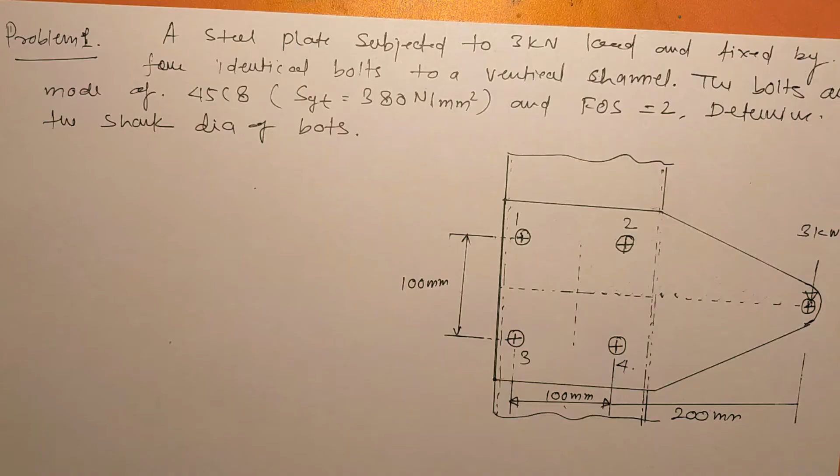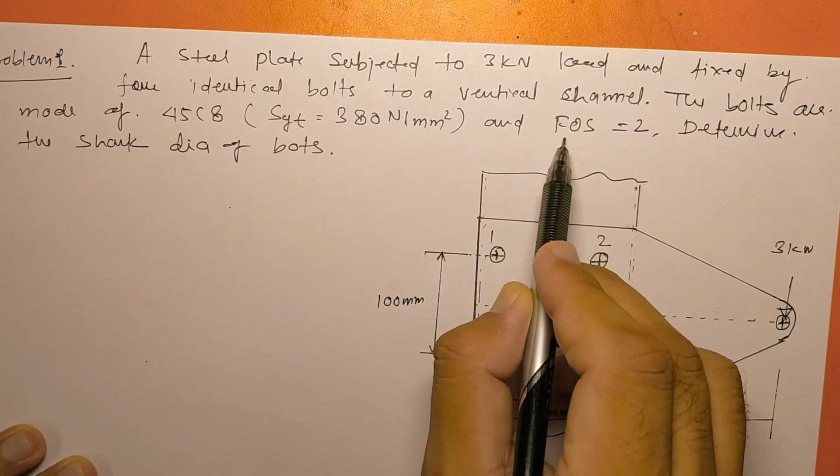Today we are going to discuss the eccentrically loaded bolted joint in shear. So in the first problem we are given a steel plate subjected to a 3 kN load and fixed by 4 identical bolts to a vertical channel. The bolts are made of 45C8 plain carbon steel for which the yield tensile strength is given as 380 N/mm², and we are given a factor of safety of 2, and we need to determine the shank diameter of these bolts. So we'll begin with the solution.

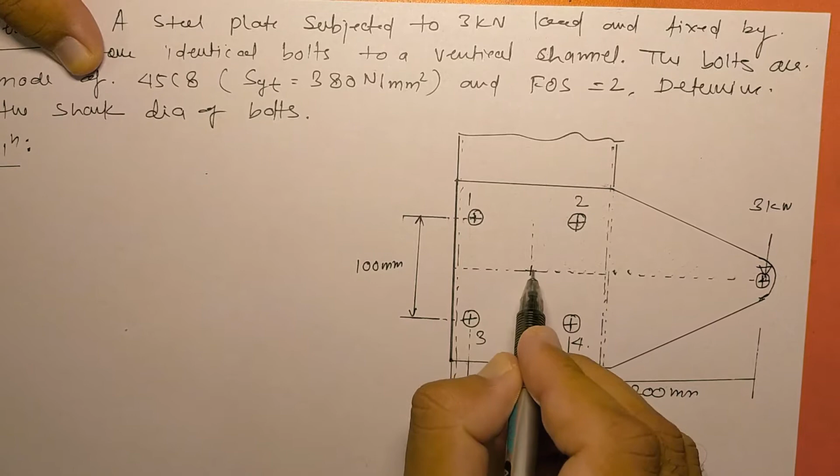So to design any component, the first step is to do the force analysis. So here we need to design the bolts, so we need to find out the forces acting on these 4 bolts. So before going into the solution of this problem, I'll discuss one concept of transferring force from one point to another point. So for that, if we consider a

object, and suppose this is the center of gravity of this object, G, this point, and one force acting at this point in this direction, this is force F. So this is the line of action of this force F. So now we want to transfer this force F to the center of gravity, this point G.

So for that, if we apply 2 forces at this point G, one force F in this direction which is equal in magnitude to this force F and parallel in direction, and a second force just opposite to this and equal in magnitude, F, in the opposite direction, they will nullify the effect. So ultimately there is no effect of these forces.

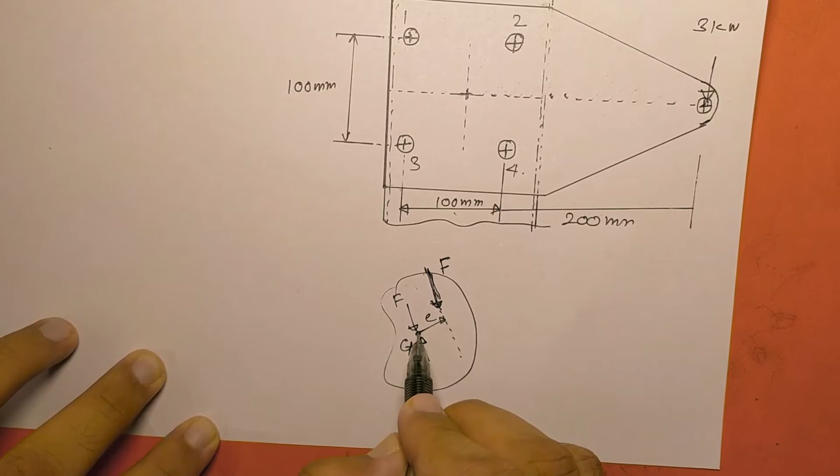But now what we can do, suppose this offset is E. So now we can think about this force F and this force F all together will create a moment about this point G. So the effect of this F and this F can be replaced by a moment about this point, and this force F will remain as it is.

So this complete system, earlier this was just like that, this is point G and this is F and this offset E. So we did one thing, we applied 2 equal and opposite forces F and F, and now this can be replaced by this. This is point G, this F will remain as it is, and this F and this F will create a moment about this point G.

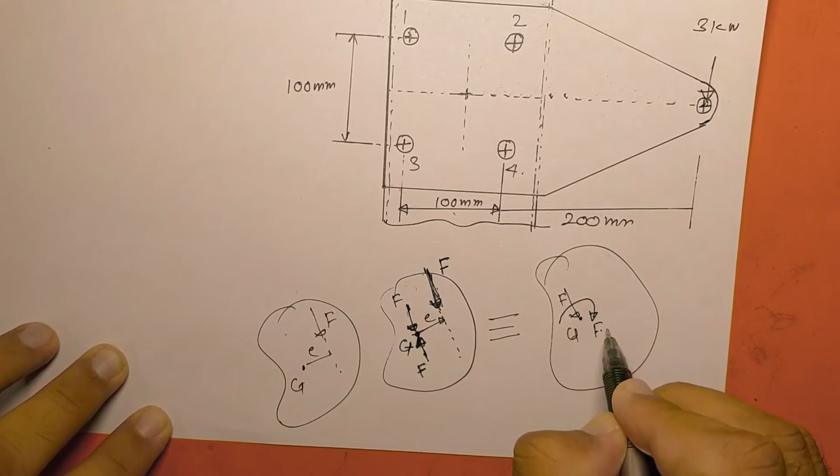That moment would be this F multiplied by E, and the direction would be in this direction. So there would be a moment of F into E in this direction. So this system can be represented by this, both are the same thing. So this F can be replaced or can be transferred to this point G. So a similar concept will be used here.

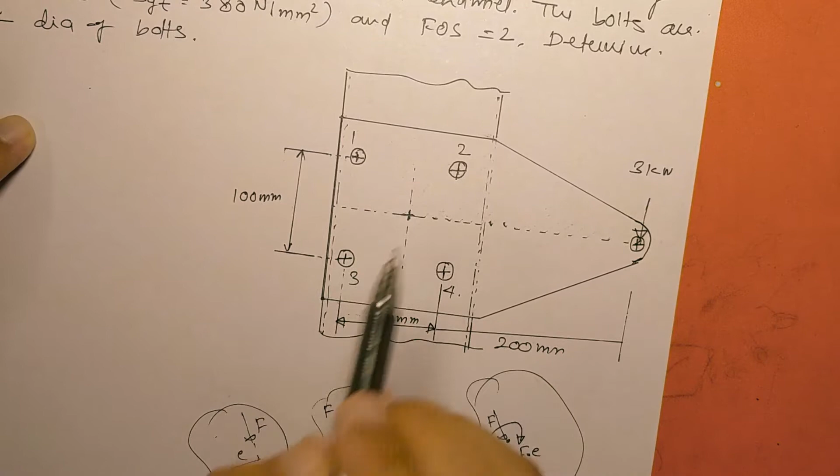So this 3 kilonewton force, and first of all we have to locate the geometrical center of gravity of this geometry. So here we can say this distance is 100 mm and this distance is also 100 mm. So we can say all 4 bolts are located at the corners of one square. So the center of gravity can be found using the formula x bar equals summation of A_i x_i bar over summation of A_i, and similarly we can find y, but from symmetry in this case we can say the geometrical center would be this one. So this is point G. So at this point G we can transfer the effect of this 3 kilonewton.

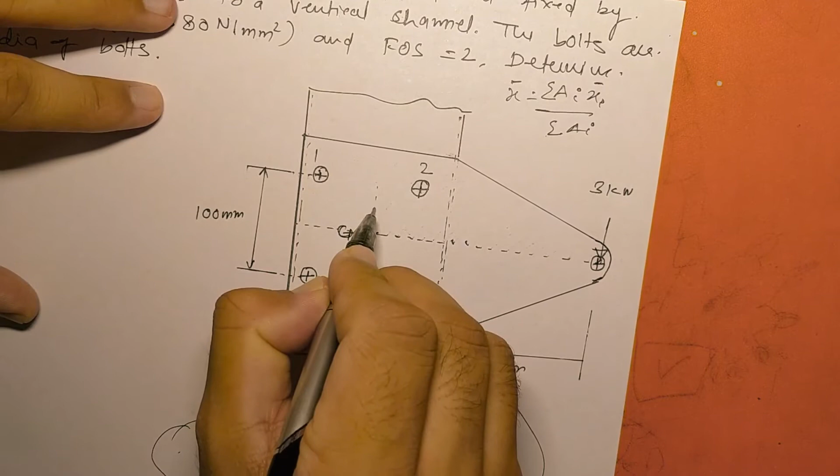So the effect of this 3 kilonewton load would be one force in the downward direction which is 3 kilonewton, and because of this 3 kilonewton force and this offset, this is 200 mm and this is 50 mm. So 50 plus 200, this is 250, we represent this offset by E. So this 3 kilonewton multiplied by E, there would be one moment in this clockwise direction. This is equal to F into E. So F is 3 kilonewton and E is equal to 250 mm. So now we need to consider this system only, or we'll draw it here.

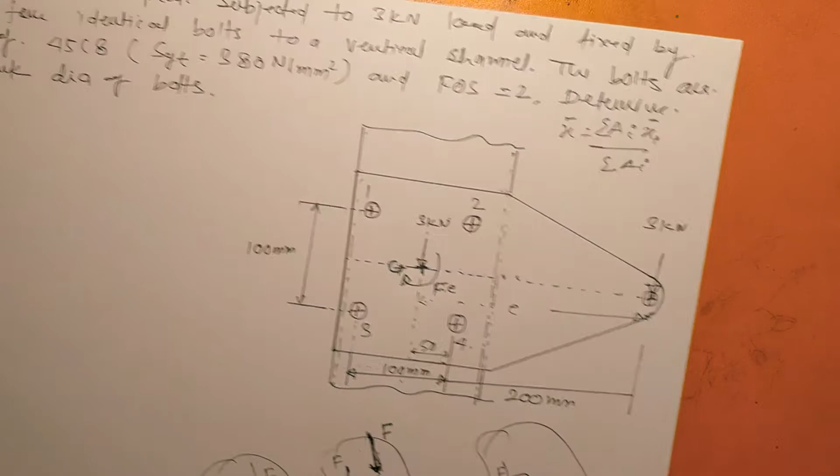So suppose this is our geometry and these four are bolts. This is 1, this is 2, this is 3, and this is 4, and this is point G, and at this G point there is one 3 kilonewton load and there is one moment which is F into E.

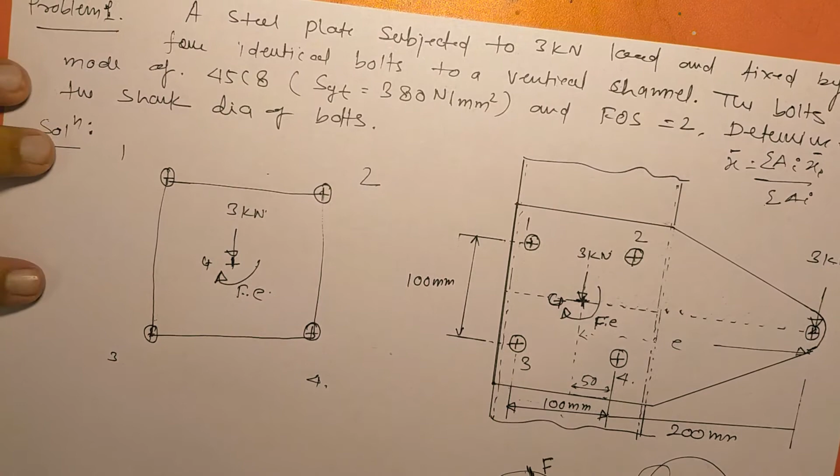So now we'll do the force analysis, or force acting on these four bolts. First of all we need to find out the forces on the bolts because of this 3 kilonewton. So we can say this 3 kilonewton load will be shared by all four bolts, and this will be distributed in equal amount on all four, and that force would be a shear force. So first of all shear force,

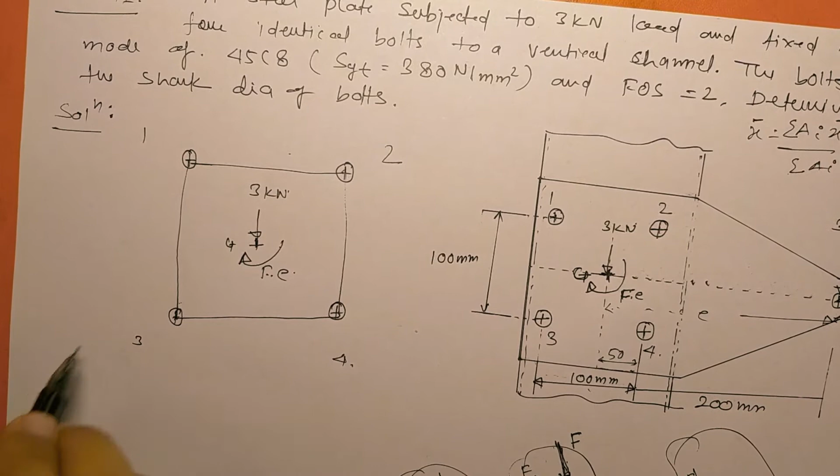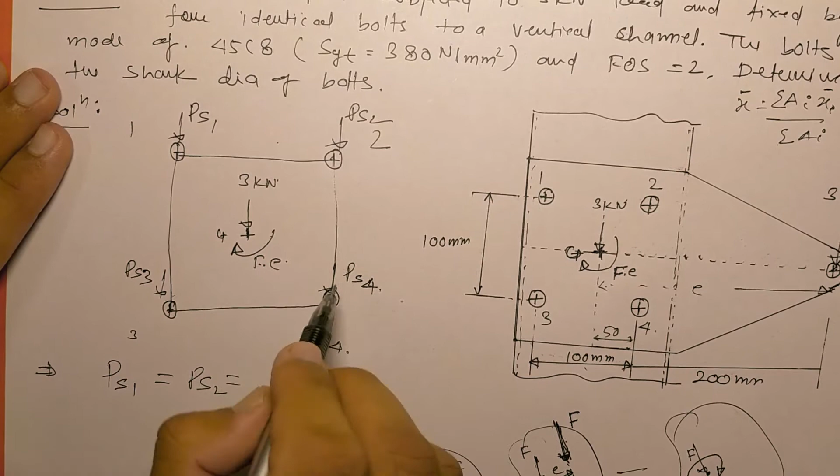I'll write PS1, the shear force on bolt 1, is equal to PS2. This is the downward force on 2, PS1, PS2, PS3, and this is PS3, and this is PS4. So these all forces would be equal. PS4 is equal to total F, this is 3 kilonewton, divided by number of bolts, 4. So 3 kilonewton divided by 4. So this would be 750 Newton. So the first force because of 3 kilonewton we have found out, which is 750 Newton.

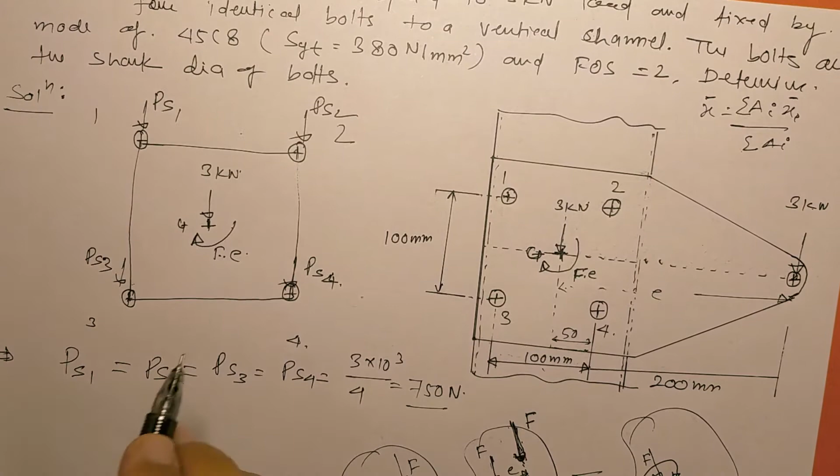And now there would be another force that would also be a shear force, because this F into E would try to rotate this structure in this direction, and these bolts will apply the force on this structure in the opposite direction and create the equal amount of moment in opposite direction. So now we need to find out the force because of this F into E.

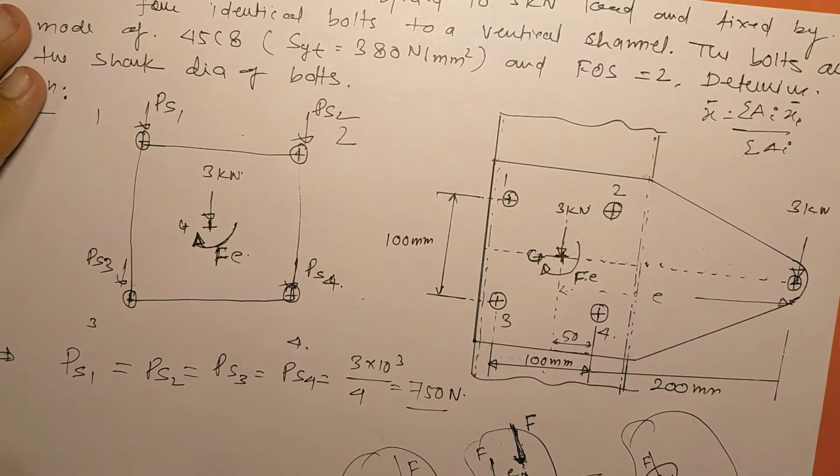So for this, first of all we need to find out the distance at which these bolts are located from this G point. So suppose this is the distance of first bolt, and we'll designate it by R1, and this is the distance from G point of second bolt. This is R2. This is the distance R3, and this distance is R4. So now we know this distance is 100 mm given, and this arm is also 100 mm. So this is a square, and this is the center of the square, intersecting both of the diagonals at this point.

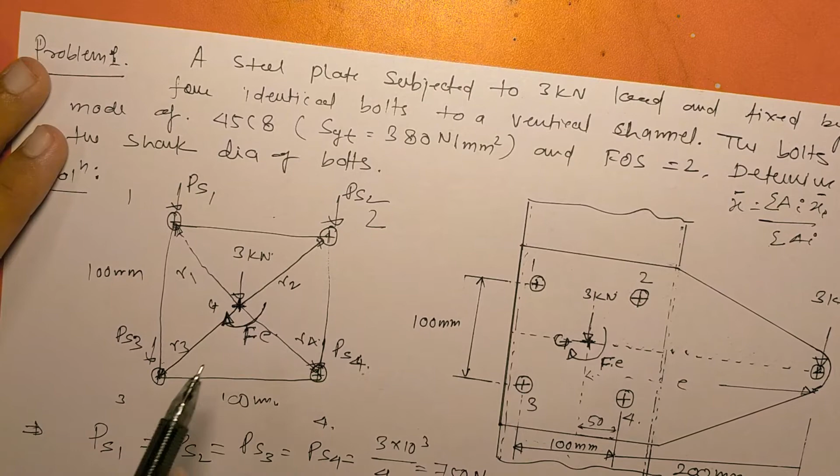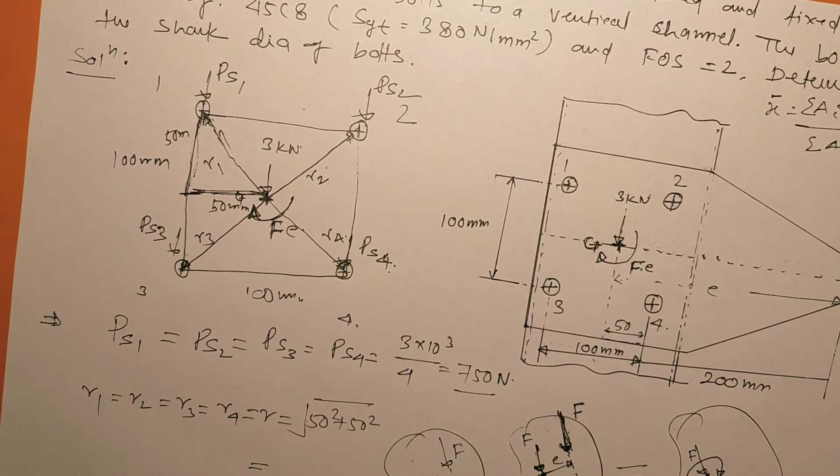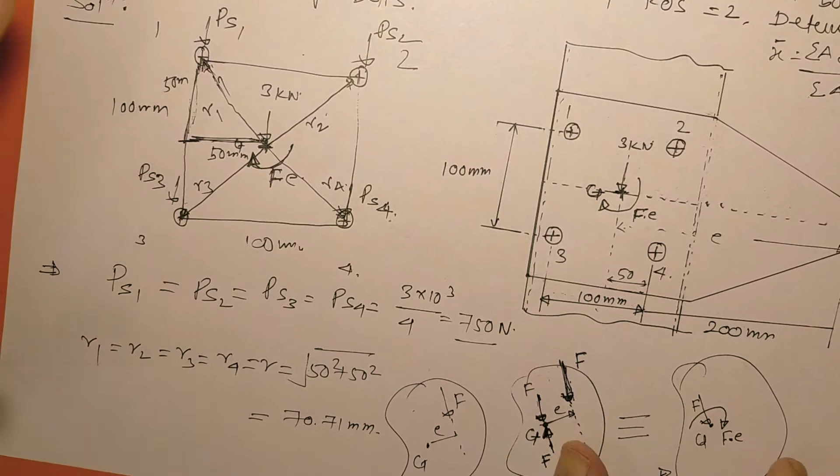So we know that this distance R1 is equal to the square root of this distance squared plus this distance squared. We can say this is 50 mm from the geometry, and this distance is also 50 mm. So R1, R2, R3, R4 all will be equal. So we can say R1 equals R2 equals R3 equals R4, and we call it R. That would be equal to the square root of 50 square plus 50 square. And if we solve this with the help of a calculator, then this would be 70.71 mm. So now we know the distance of all the four bolts from the center of gravity, this G.

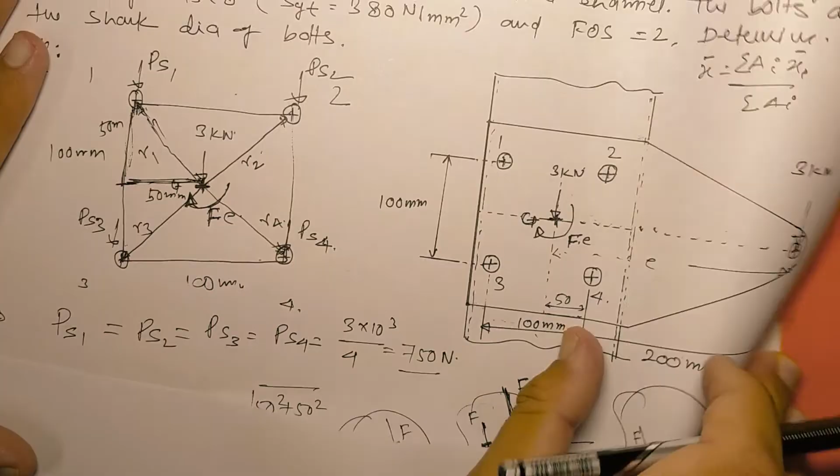So now we need to find out the forces because of this moment, and we know that the moment created by the reaction force exerted by all the 4 bolts on this plate would be equal to this F into E. So we can write one equation. We can say this F into E must be equal to the moment created by the reaction force exerted by all the bolts on the plate.

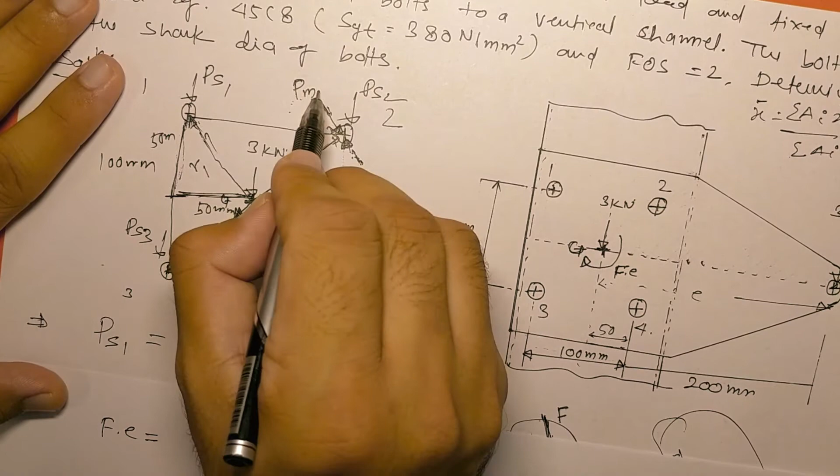And we know that if this is the direction of this F into E, the forces exerted by the bolt on the plate would be in this direction, and force on the bolt would be in this direction, and that would be perpendicular to this radial distance. This is the force on the bolt and this is the force exerted by the bolt on the plate, and both would be equal in magnitude. So we can designate these forces by Pm. M stands for moment, or we can say the force because of moment. So Pm2, Pm1, Pm3 and Pm4.

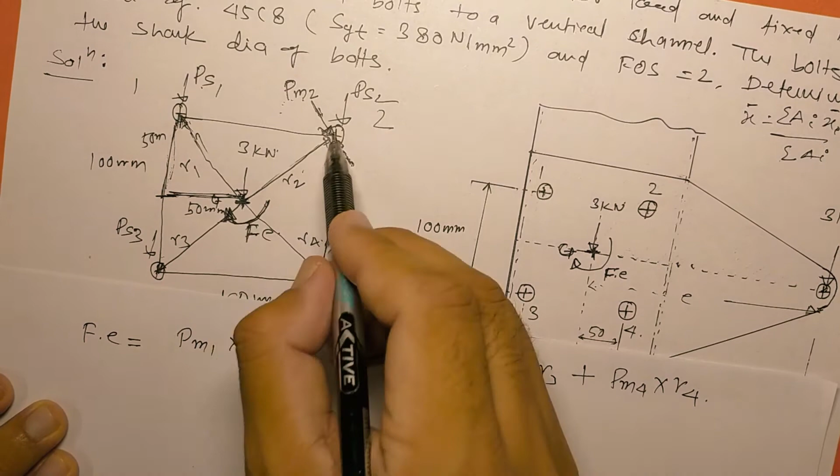So now we can write Pm1 multiplied by R1 plus Pm2 multiplied by R2 plus Pm3 multiplied by R3 plus Pm4 multiplied by R4. And one more thing, the force because of this moment on the bolt would be proportional to the distance from this point. So we can say Pm1 would be proportional to the distance, and distance is R1. So if we remove this symbol of proportionality, we can say Pm1 is equal to some constant C into R1. Similarly, Pm2 is equal to C R2, and we can say Pm3 is equal to C R3, and Pm4 is equal to C R4.

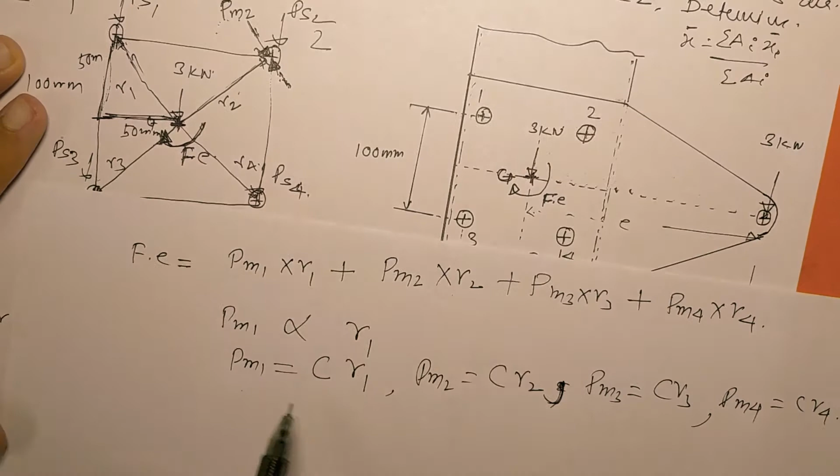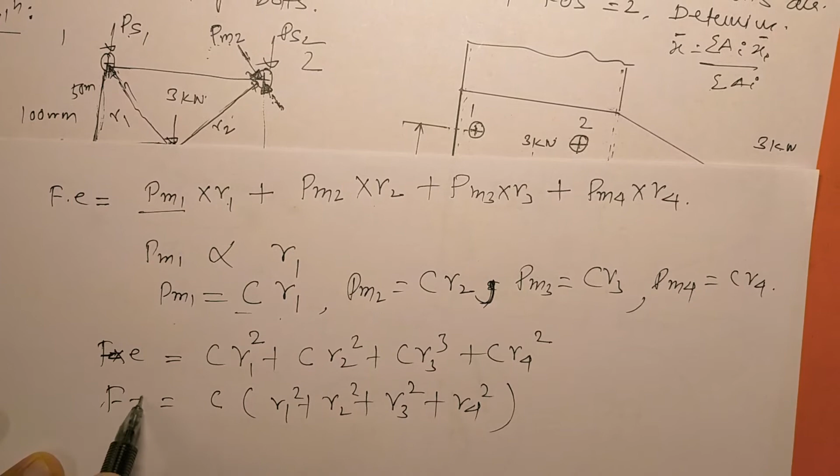So if we replace these values in this moment balance equation, then F multiplied by E is equal to, in place of Pm1 we can write C R1, plus R1 into R1, C R1 square, C R2 square, C R3 square plus C R4 square. So we can take C as common: C and R1 square plus R2 square plus R3 square plus R4 square. From here we can find this constant C, and C equals Fe divided by R1 square plus R2 square plus R3 square plus R4 square.

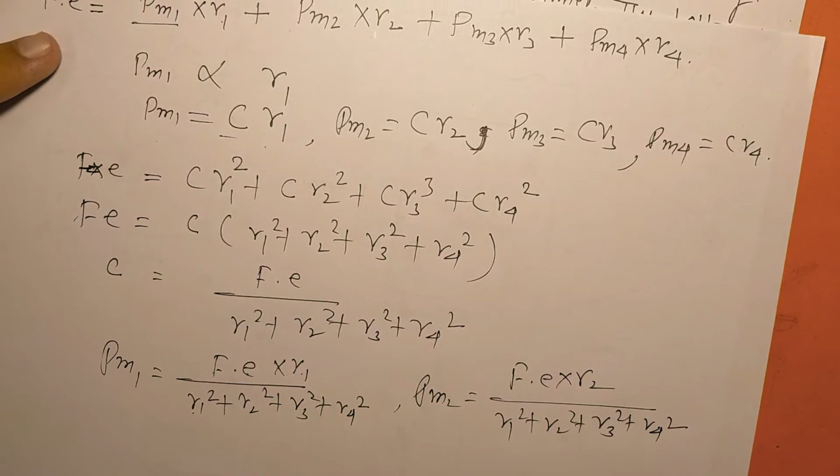Now we can find Pm1 because we know the value of C. So Pm1 would be C, which is F into E over R1 square plus R2 square plus R3 square plus R4 square, multiplied by R1. Similarly, Pm2 would be Fe multiplied by R2 over this value. So we can write Pm2 is equal to Fe multiplied by R2 over R1 square plus R2 square plus R3 square plus R4 square.

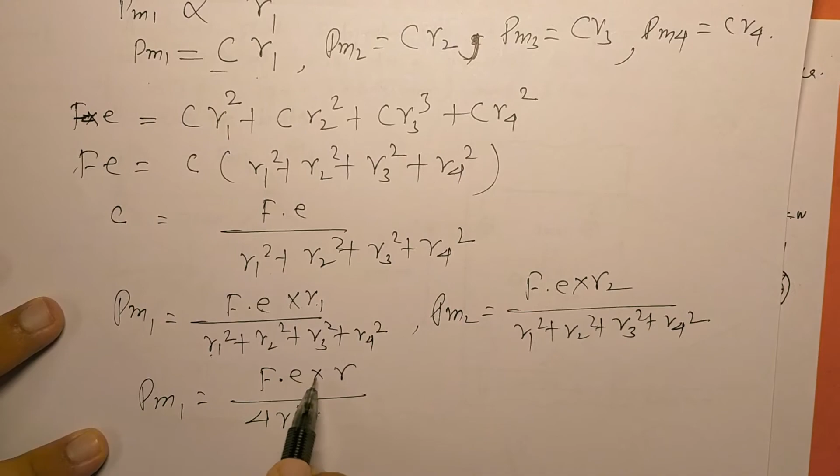But in this particular problem, R1, R2, R3, R4 are all equal. So for this problem we can write Pm1 is equal to Fe multiplied by R1, which equals R, and the denominator becomes 4R square. If we replace these values, the offset E equals 200 plus 50, that is 250 mm.

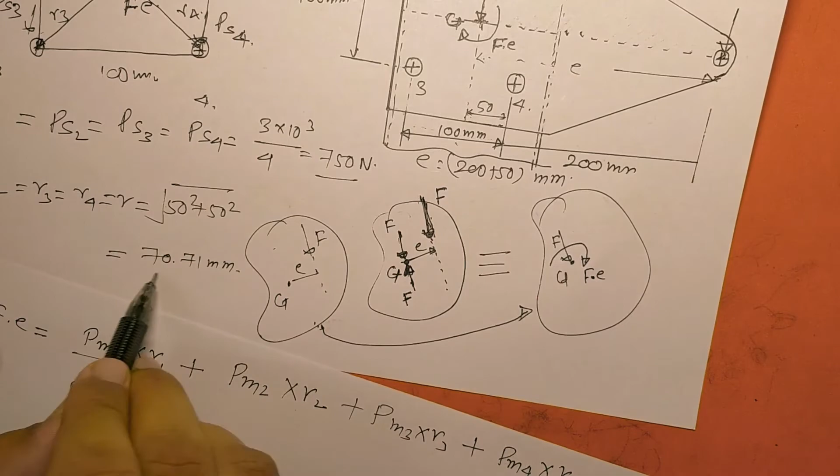So now we can replace the values here. F is equal to 3000 Newton, E equals 250 mm, and R, which we calculated, equals 70.71 mm. So this becomes 70.71 mm over 4 times R square, 70.71 mm square. If we calculate this, we get the value equal to 2651.68 Newton.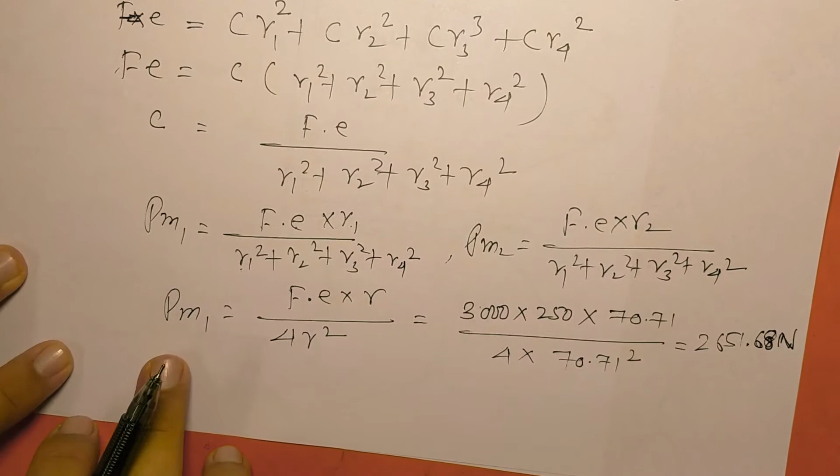The second shear force, because of the moment, is 2651.68 Newton, and the first shear force, because of the vertical 3 kilonewton load, was 750 Newton. So now we need to decide the heavily loaded bolt.

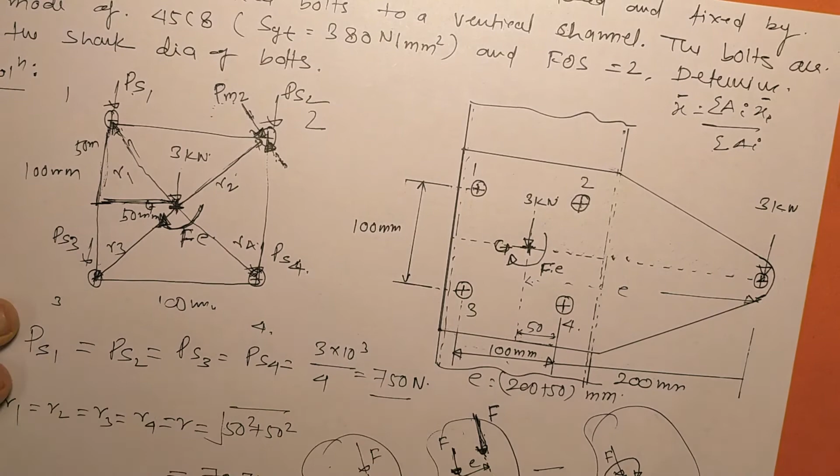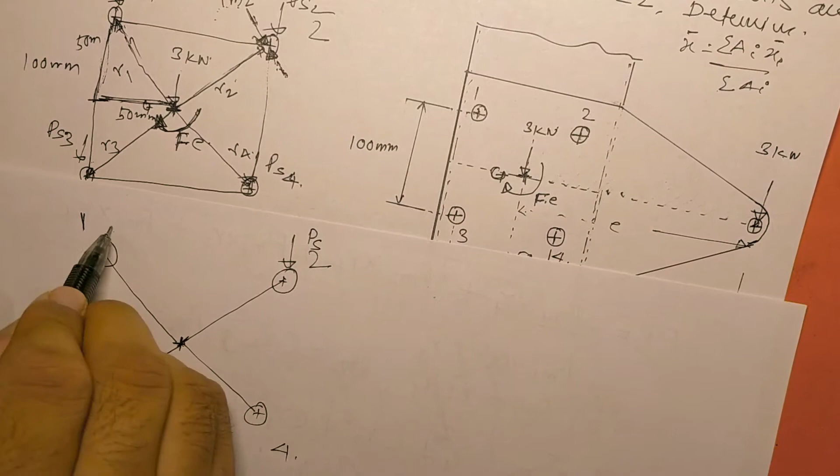I'll replot this diagram. So this is R, these are 4 bolts, and this is the center. These are bolts 1, 2, 3, 4, and there is one force PS. This force, which we found because of the 3 kilonewton load, is also PS. And because of the moment, there would be a force on the bolt in this direction, perpendicular to this. So this is the direction of the PM force.

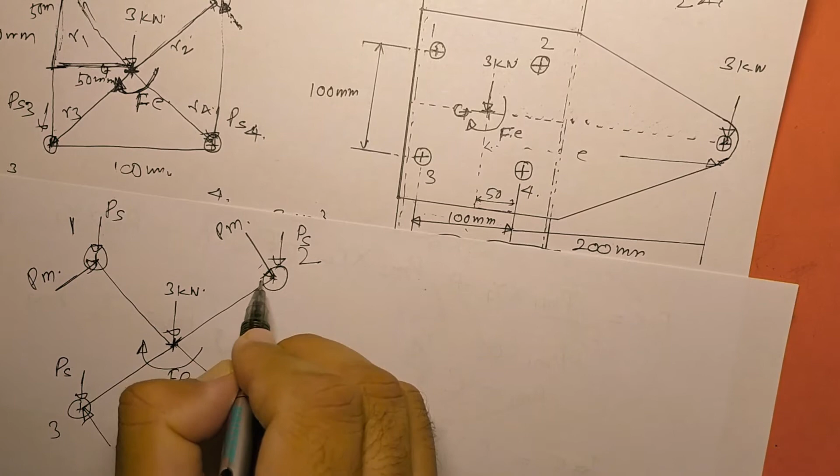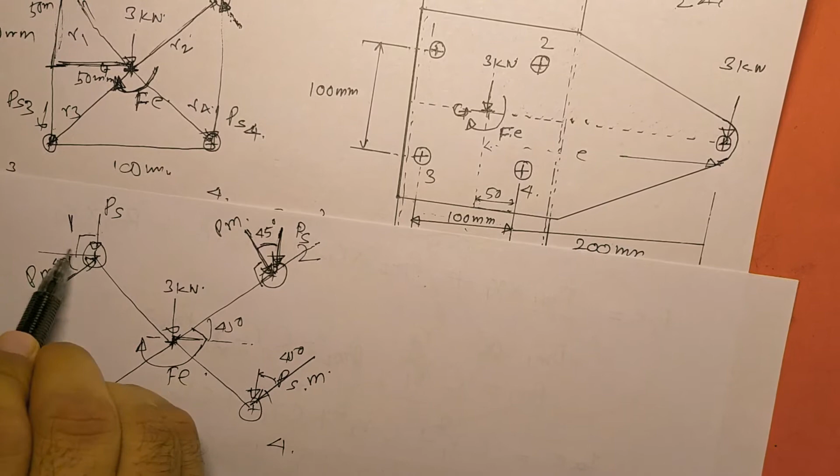Now we can say this angle is 90 degree, and the angle between this force PS, the shear force because of the vertical downward force, and this PM, the shear force because of the moment, would be 45 degree. From this geometry, if this angle is 90 degree and this is vertically downward, then this is 45 degree, and similarly this angle is also 45 degree. This would be 90 plus 45, total 135 degrees.

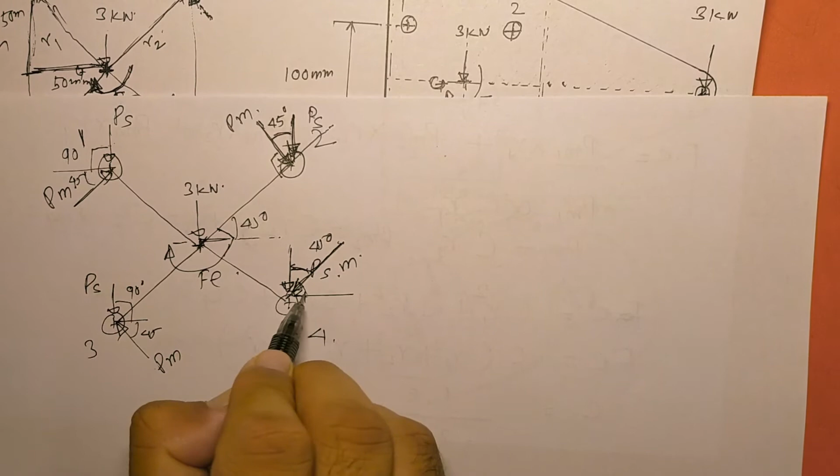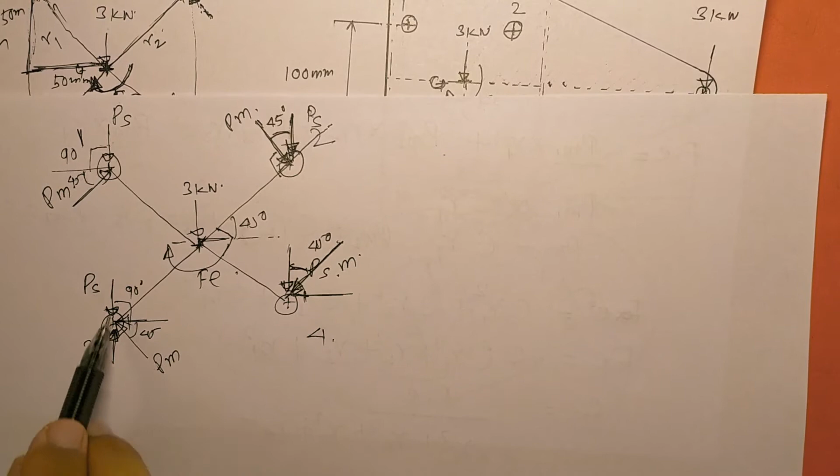If we find the resultant of these forces, we will find that bolt 2 and bolt 4 will be sharing more load, because this downward force PS is equal in all the bolts, and PM is also equal in magnitude. But if we resolve this PM into two components, there would be one downward component and one horizontal component. Similarly, if we resolve this other force, one component would be vertical and one horizontal. So this horizontal force and this horizontal force cancel out each other, and the effective downward force would be PS minus PM sine 45.

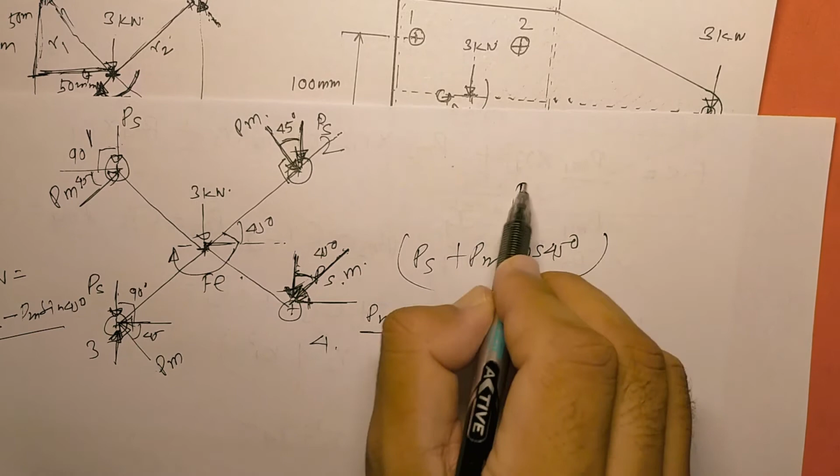So this is the effective P in the vertical downward direction. In this other case, the vertical downward force would be PS plus the cos component of this PM. So PM cos 45 degree, and this would be PM sin 45 degree. So this is the vertical force and this is the horizontal force.

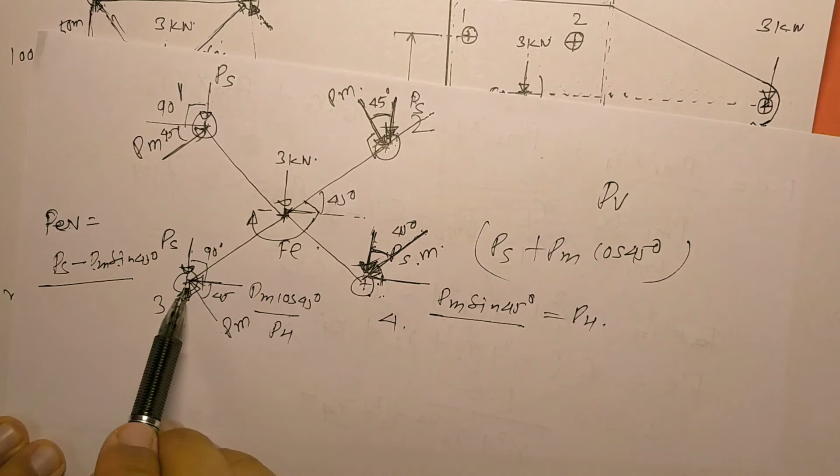And in this case, the effective vertical force would be PS minus PM sin 45 and the horizontal force is PM cos 45. So if we take the resultant of this vertical and this horizontal component, this would result in the larger force, and both of bolt 2 and bolt 4 would be loaded with the same load, and these two will be loaded with more load with respect to 1 and 3. So we can find out the effective load on bolt 2 or bolt 4, and we'll design the bolt

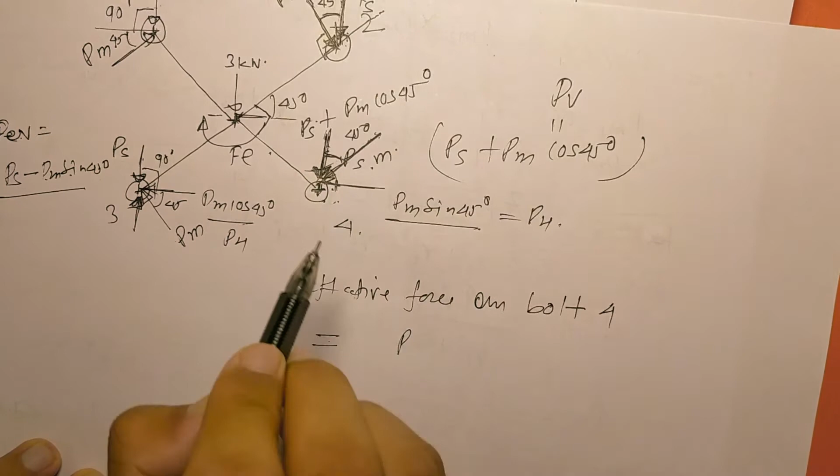according to that. So we can say the effective or resultant force on bolt 4 or 2, whichever, both are loaded with the same load. So that would be this PS, because this is the vertical load. The component of this PM is this already, this was PS plus PM cos 45 degree, and this is the horizontal component. So we can say PS plus PM cos 45 degree square of this plus square of the horizontal component. This is PM sin 45, so this PM sin 45 degree square, and the square root of this is P effective on 4 or 2 bolt.

So if we solve this, PS is equal to 750 Newton and PM was 2651.68 Newton. So we replace these values. So this would be 750 plus 2651.68 cos 45 degree whole square plus PM is 2651.68 sin 45 degree whole square and square root of this whole quantity. So if we solve this, the P effective force, now we are solving at bolt 4, so this is P effective on 4. P effective 4 is equal to 3225.9 Newton. So this is the P effective or resultant force on the bolt 4.

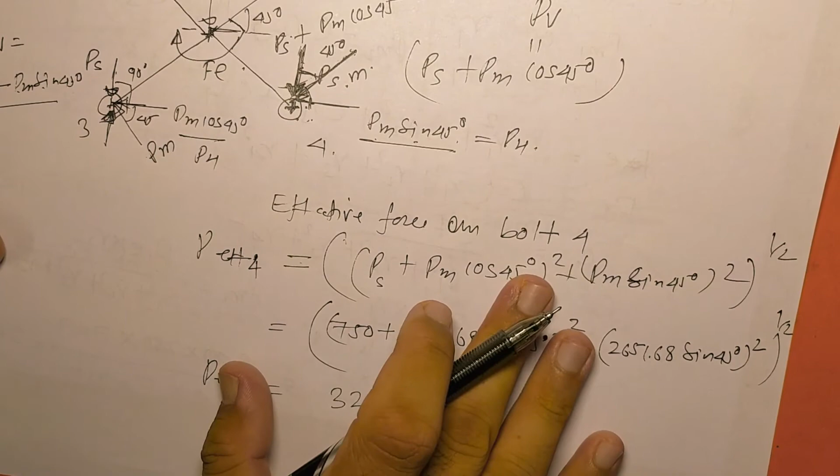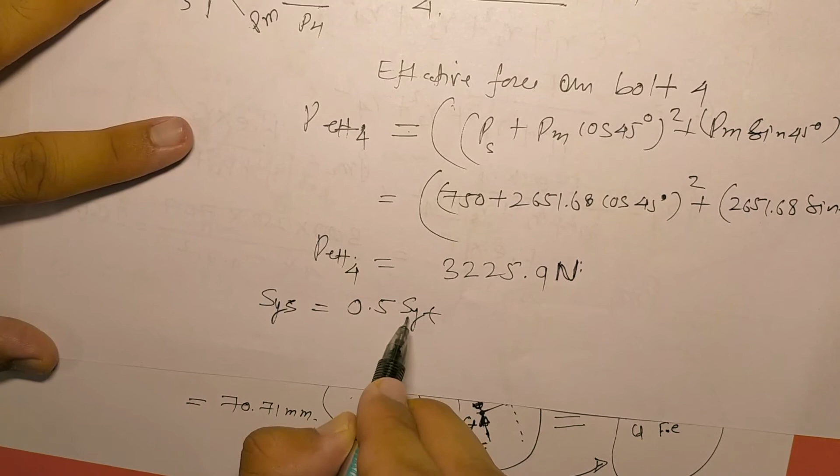And this is the shear force. So we can calculate the diameter using the shear stress. So we are given the capacity or strength of this bolt, that is SYT is equal to 380 Newton per mm square. So if we know the relationship, yield shear stress is equal to 0.5 of tensile yield strength, SYS is equal to 0.5 of SYT. So this is equal to 0.5 of 380 Newton per mm square. So this is the permissible shear yield strength. So if we consider the factor of safety is given as 2.

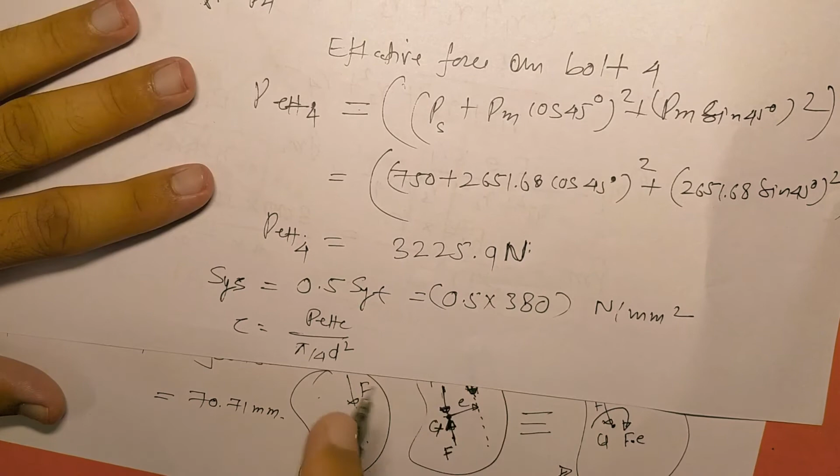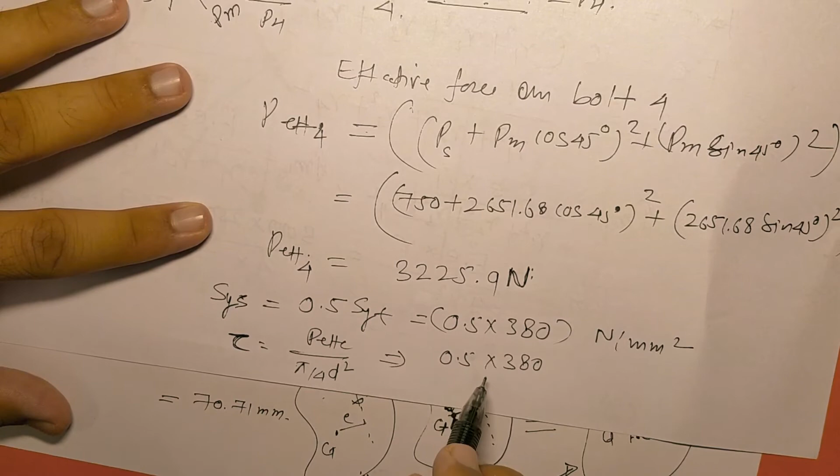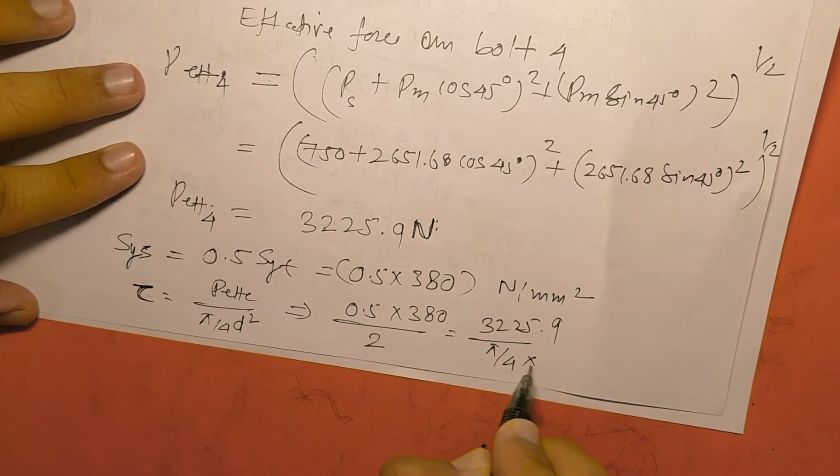So if we consider the factor of safety, then we can say that tau equals P effective over pi by 4 d square, and tau is equal to SYS, which is 0.5 into 380 divided by the factor of safety, given as 2, is equal to P effective, which is 3225.9, divided by pi by 4 into d square. So if we solve this, that would be 6.58 mm. So this is our answer. The shank diameter of these bolts would be 6.58 mm.

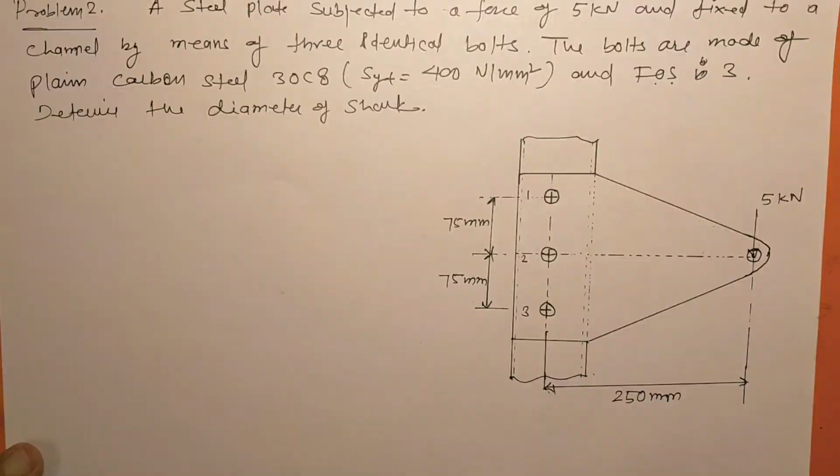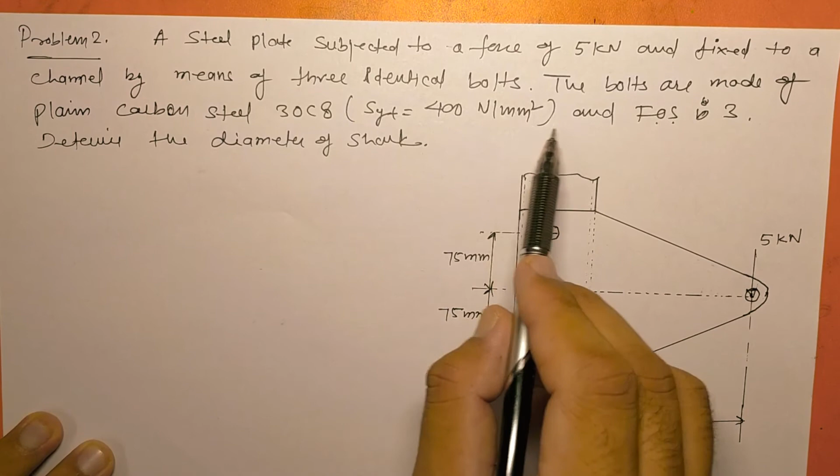So in this problem we are given a steel plate subjected to a force of 5 kN and fixed to a channel by means of 3 identical bolts. The bolts are made of plain carbon steel 30C8 and the tensile yield strength for that is 400 Newton per mm square and the factor of safety is 3. So we need to determine the shank diameter for these bolts.

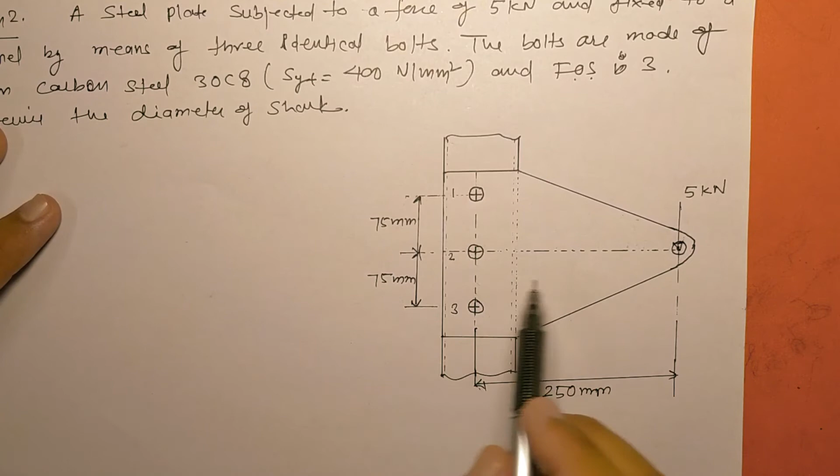So this is the steel plate, which is loaded by 5 kN at an offset of 250 mm. So in this again we use the same fundamental to transfer this 5 kN to the center of this bolt geometry. So as we discussed, this 5 kN load can be transferred here. This is the 5 kN load, and this 5 multiplied by 250 mm would be a moment that can be transferred at this point. This is the geometrical center of all 3 bolts.

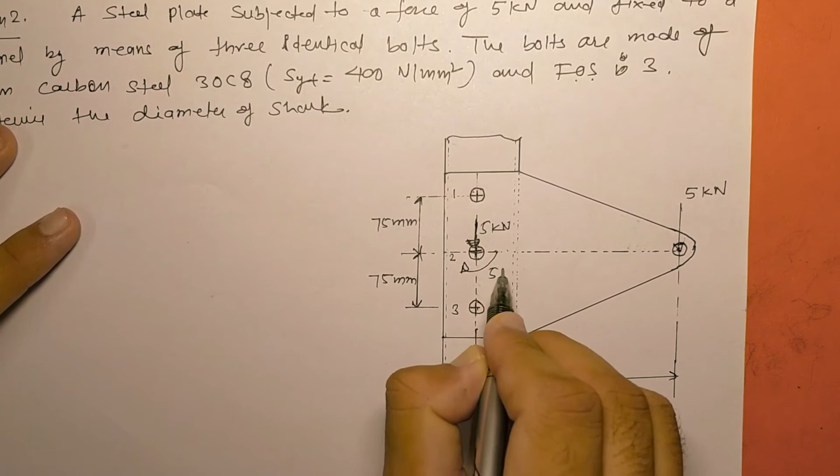So there would be one moment that is 5 kN multiplied by 250 mm. So this is the moment acting in the clockwise direction. So first of all we need to find out the shear force because of the 5 kN load, and that would be that this 5 kN load will be shared by all 3 bolts.

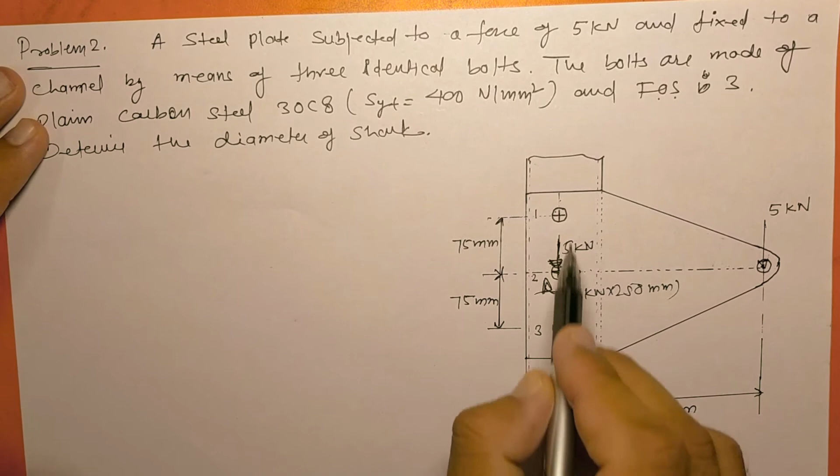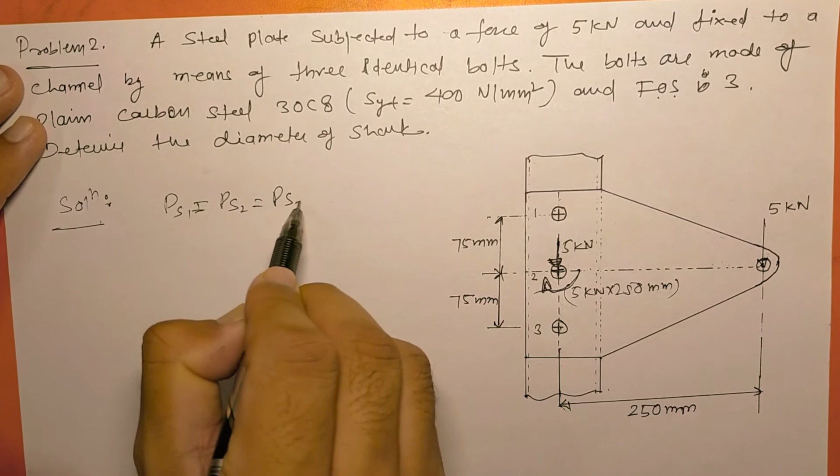So PS1 is equal to PS2 is equal to PS3, and that would be 5 kN divided by the number of bolts, 3. So this would be equal to 1666.67 Newton. And now the shear force because of this moment: there would be no shear force because of moment at bolt 2,

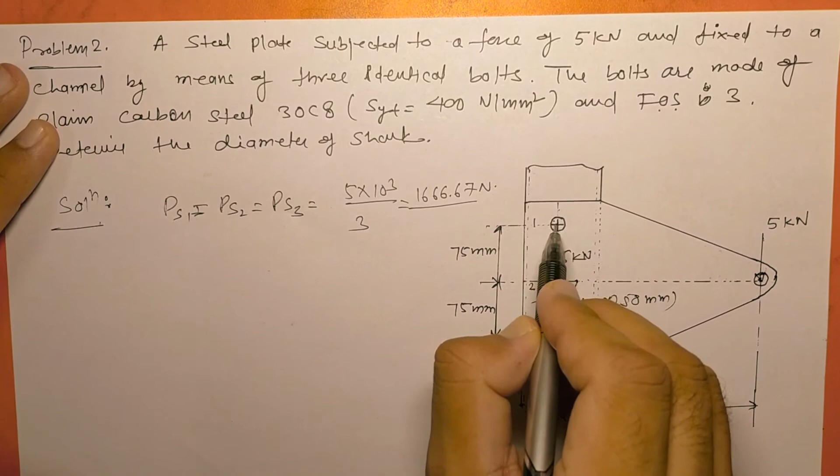and because of this moment there would be one force on bolt 1 in this direction, and we'll write PM1, and this was the direction of PS1. Similarly this is PS3, and because of this moment there would be one force in this direction, PM3.

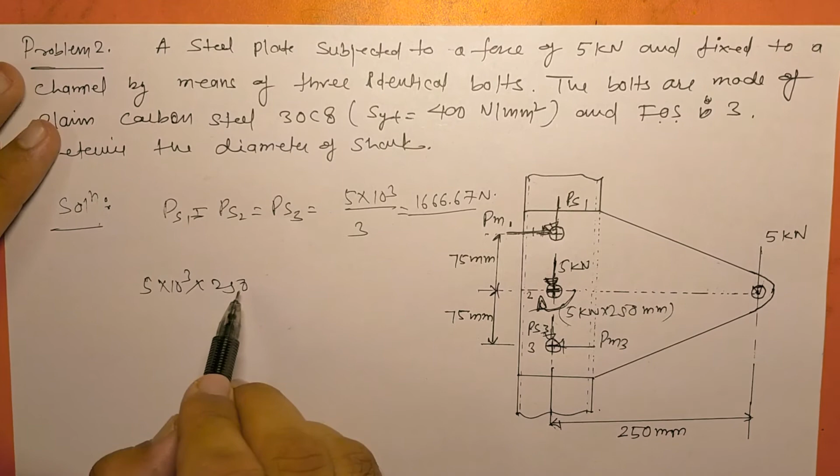So from the moment equilibrium we can say this 5 kN multiplied by offset 250 mm, this moment must be balanced by the moment created by the force exerted on bolt 1 and the force exerted on bolt 3. Because of this they will exert the reaction force on the plate, and those reaction forces will be in equilibrium with this moment. That reaction force would be equal to PM1 only, but in the opposite direction. So our aim is to find out the PM1 and PM3 which are acting on the bolts.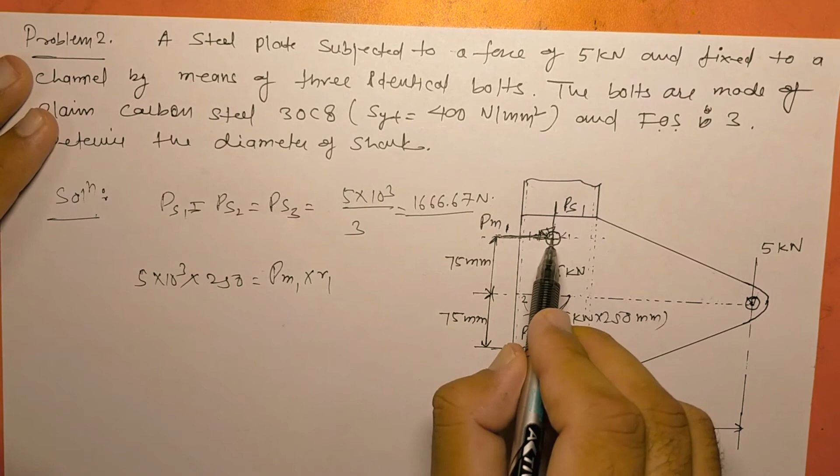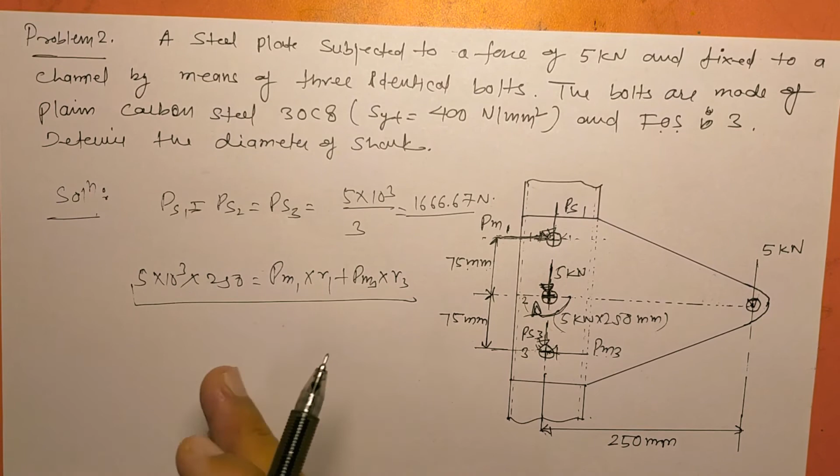So we can say PM1 multiplied by R1. R1 is the distance of this bolt location from the center of geometry, and that is given as 75, plus PM3 into R3. So this is the moment equilibrium equation. From here we can find out the PM1, and for that fundamental I recommend to see our last video.

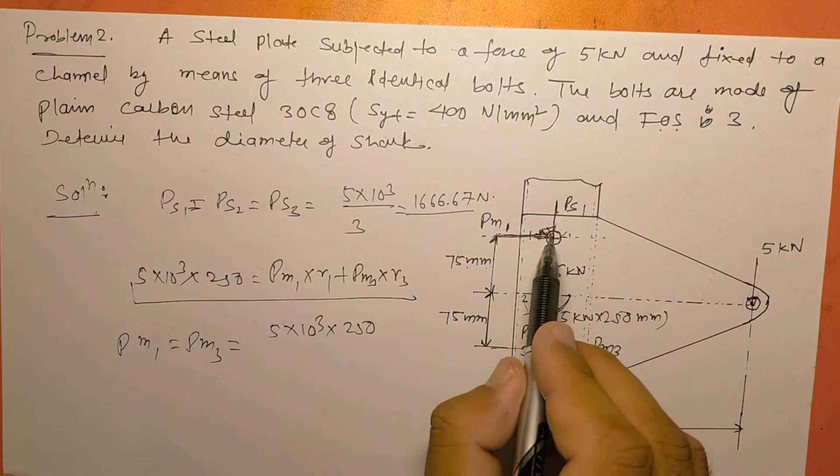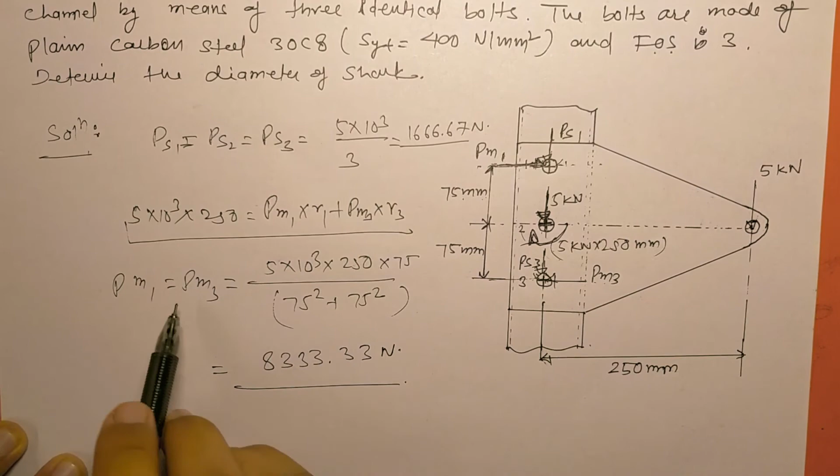PM1 and PM3 both bolts are located at the same distance, so PM1 and PM3 both are equal. So that would be this moment, 5 kilonewton multiplied by 250, multiplied by the distance. If we are talking about PM1, then this distance is 75 divided by 75 square plus 75 square. If we solve this, it would be equal to 8,333.33 Newton. So this is the shear force because of this moment, and this is the shear force because of this vertical downward 5 kilonewton force.

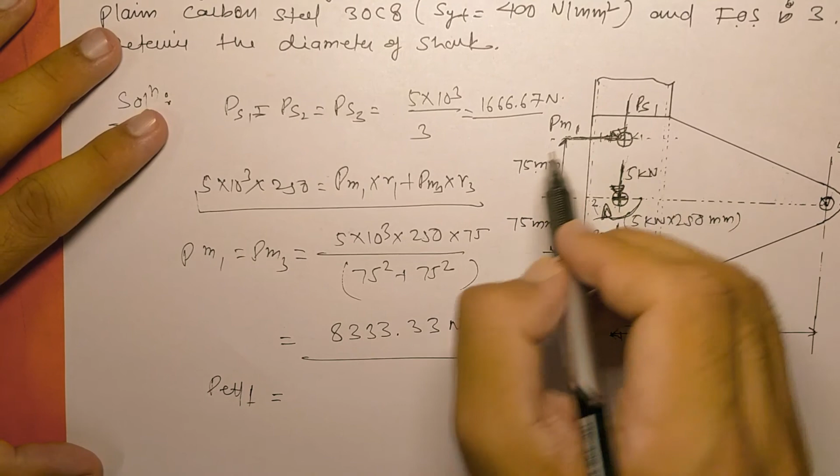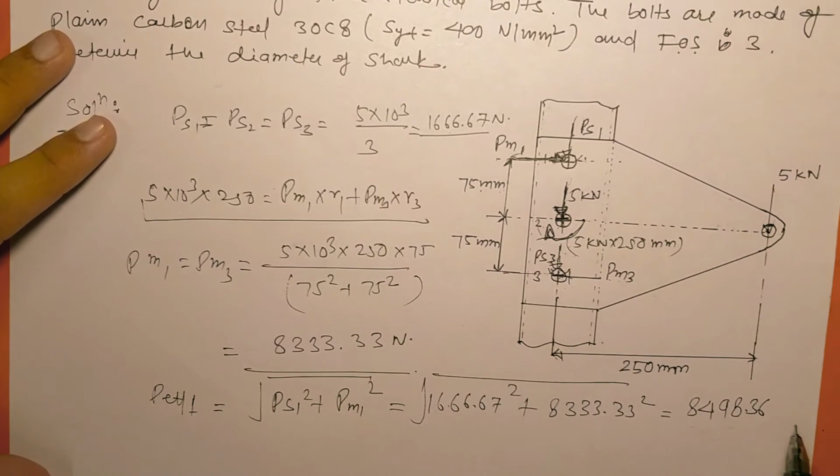So now we can find out the resultant force on bolt 1 or bolt 3, because both are loaded with the same force. So P effective on bolt 1 is equal to the square root of PS1 square plus PM1 square, and PS is 1666.67 square plus 8,333.33 square. Under root of this will give us 8498.36 Newton. So this is the P effective on this bolt 1.

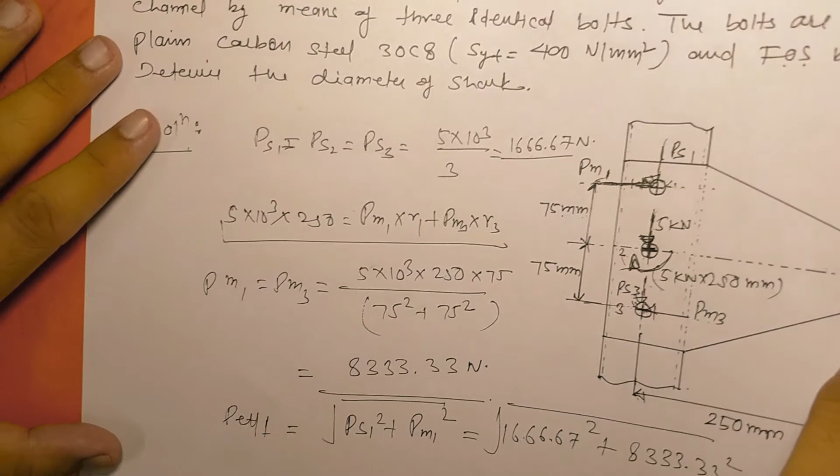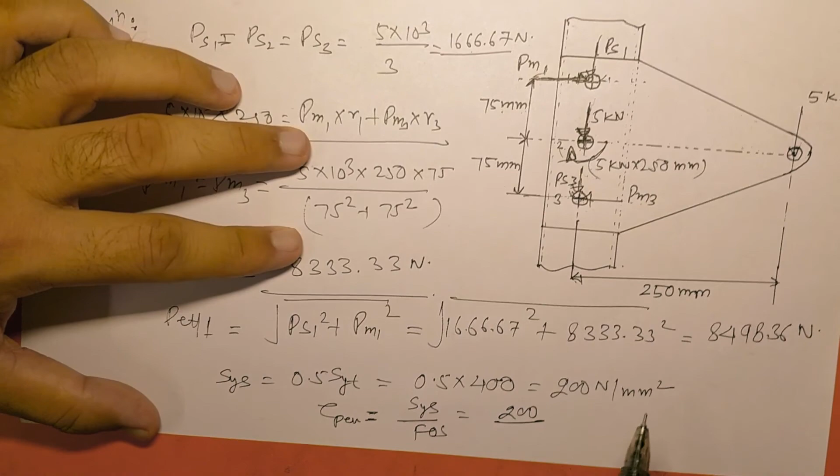So now we can find out the diameter, but before finding the diameter we need to find out the permissible stress. This bolt is loaded by shear force, so we know that the yield shear strength SYS is equal to 0.5 of SYT, the yield tensile strength. So SYS is equal to 0.5 multiplied by 400, because SYT is given as 400, so this becomes 200 Newton per mm square. And now we use the factor of safety: the permissible shear stress is equal to SYS divided by factor of safety. So this is 200 divided by 3, since the factor of safety is given as 3. So this is our permissible shear stress.

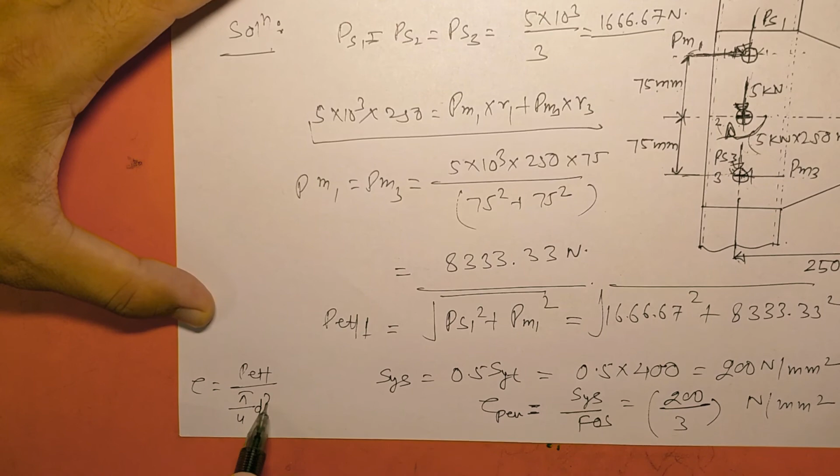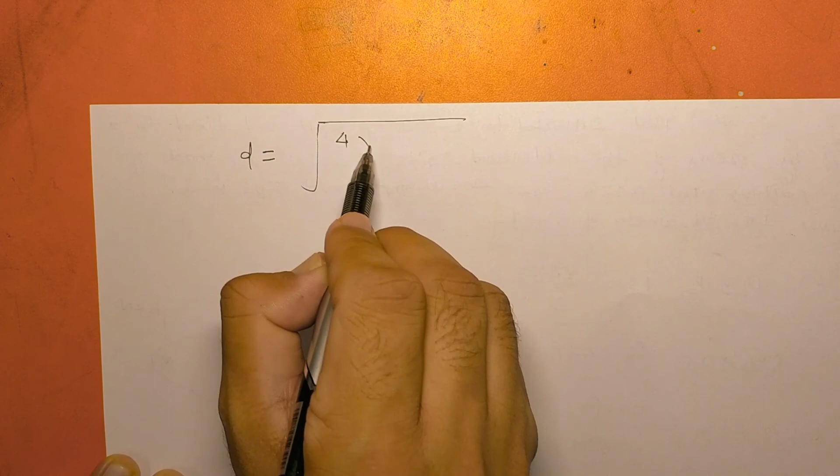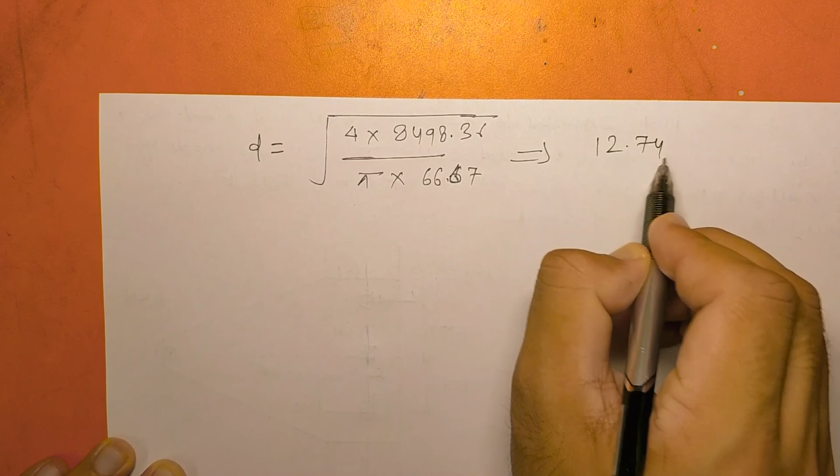So now we can use the formula to find out the diameter. Tau is equal to P effective divided by pi by 4 d square. Here tau is equal to 200 divided by 3 and P effective is 8498.36. So the diameter equals the square root of 4 multiplied by 8498.36, this is P effective, divided by pi and multiplied by 200 divided by 3. The permissible shear stress of 200 divided by 3 is 66.67. If we solve this, it would be equal to 12.74 mm. So this is the required shank diameter for the bolt used in this particular application.

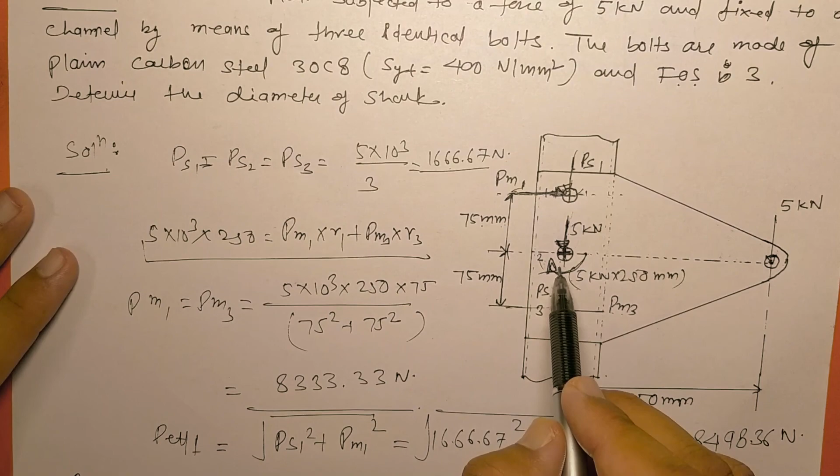So how we can transfer one load from one point to another point, for this I recommend watching the last video lecture, and by using this concept we can find out the shear force because of this vertical force and because of this moment. By using these two shear forces we can find out the effective force, and using the effective force we can find out the diameter of the bolt. Thank you.